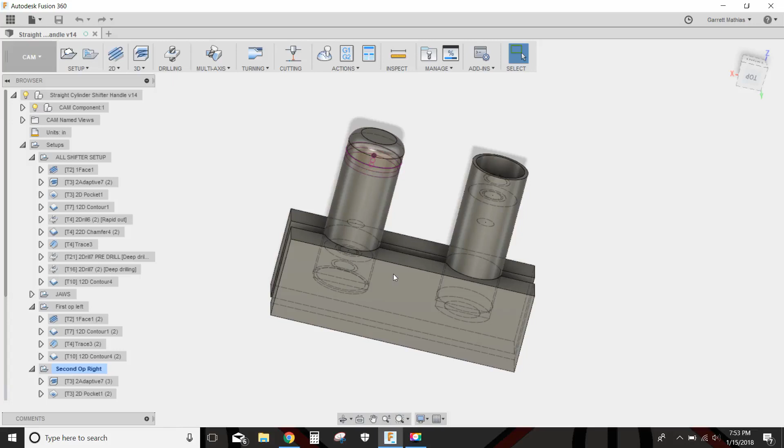Today we are going to program this part right here, and this is a shifter knob for a Ford Fiesta ST or Focus ST or Focus RS, and this is one of the simplest ones that I have ever made.

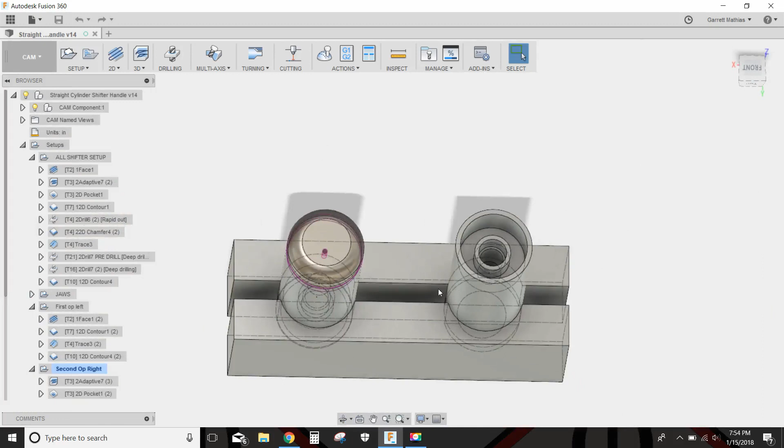Basically the stock outside here, or the stock piece I'm using, is a regular stock size piece. It's 1 3/8 inch in diameter, so I didn't have to cut anything to size, which worked out really well. So this one right here is the top side and this is the bottom side. We'll have to pocket this out and end up threading this deeper hole right here by hand with an M12 by 1.25 tap.

Now this is one of those things from when I first started, so please forgive me if anything looks kind of weird. Starting with this facing operation, for some reason I'm doing a lot of step overs here and using the shear hog, but I have no idea why I decided to step over so many times. I have a 0.06 step over with a 3/4 inch end mill. Anyway, we'll roll with it.

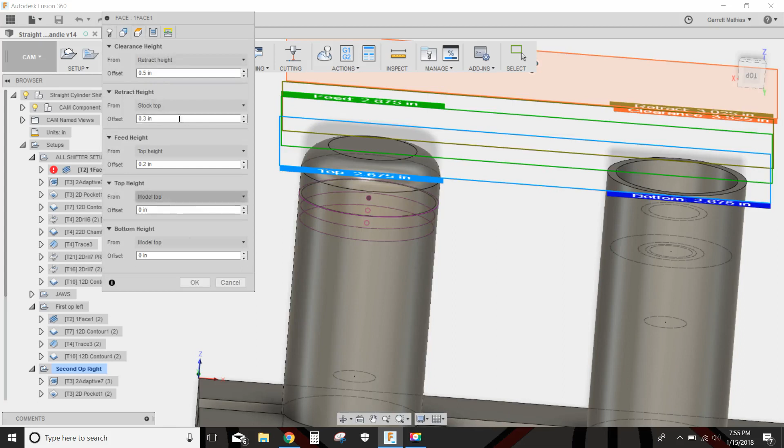4,000 RPM at 35 inches a minute, and I selected this chain right here. It doesn't really matter what you select in a facing operation because it'll just bring it down to the model top. So it always uses this model top as your bottom height by default with a facing operation, as far as I know. All the heights here are pretty default, and I used a 0.06 inch step over. I really didn't need to do that, but that's okay. I could probably go somewhere more like 0.1, and even then it probably wouldn't be enough, but that's okay.

And everything here is left alone. I almost forgot the setup here. One second while we go back to the setup.

So this stock is looking at both of these bodies here, so that's why it's 4 3/8 wide. It is 1 3/8 in depth in the Y direction, and that's just the diameter of the part, and it is 3.85 inches tall, so that's how tall each stock piece of these parts are.

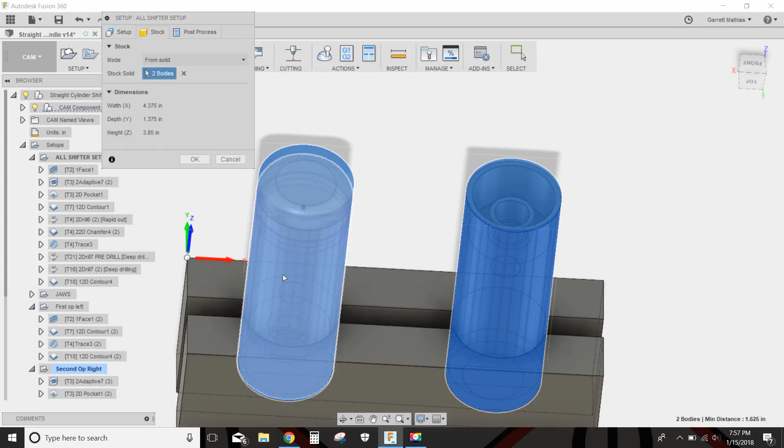In this setup I'm using these soft jaws here, and this is my point. There's no two work coordinate systems. This is my point right there on the side of the soft jaws, and that's a reoccurring theme with me. I usually use that point right there on all my soft jaws.

So after I face, I'm going to go in and adaptive everything out right here. Using a 1/4 inch flat end mill at 6,000 RPM, 30 inches a minute, I'm going to select this boundary chain, which is that green chain right there, and I have rest machining selected for no reason because it's always from the stock setup, so that doesn't really need to be selected there.

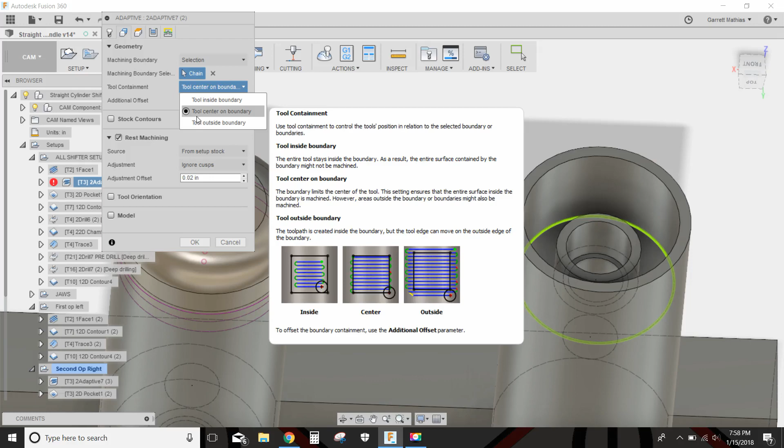From this boundary chain, I have tool center on boundary, so you can see in the dialog box here what that really does, and those dialog boxes help a ton when you're trying to figure out what the toolpath does. In the heights tab, it's pretty generic here, nothing too big going on because this is a regular 3D adaptive toolpath, so it just knows what's going on wherever. It's kind of cool how it works out, so you don't really have to do too much with those, is what I found out.

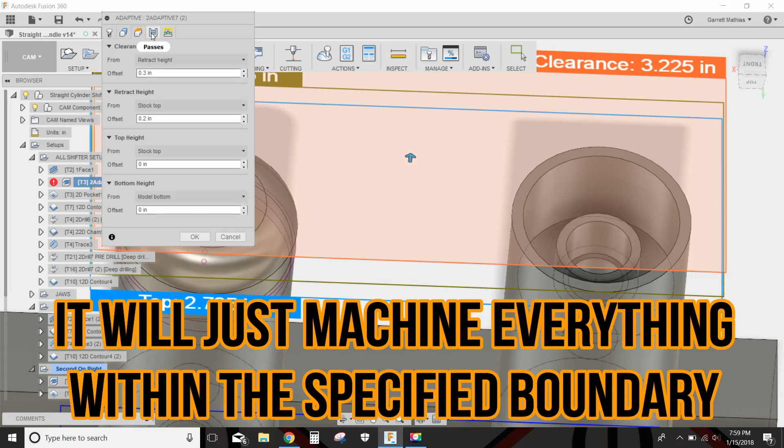Our width of cut or optimal load will be 50 thousandths of an inch. That stays the same. My roughing step down will be 0.13 inches, and my fine step down will be 0.1 inches. I'm leaving 10 thousandths of an inch radial stock to leave, so that's on the sides, and I'll come back and clean that up later. Everything on this tab should remain the same, except this right here.

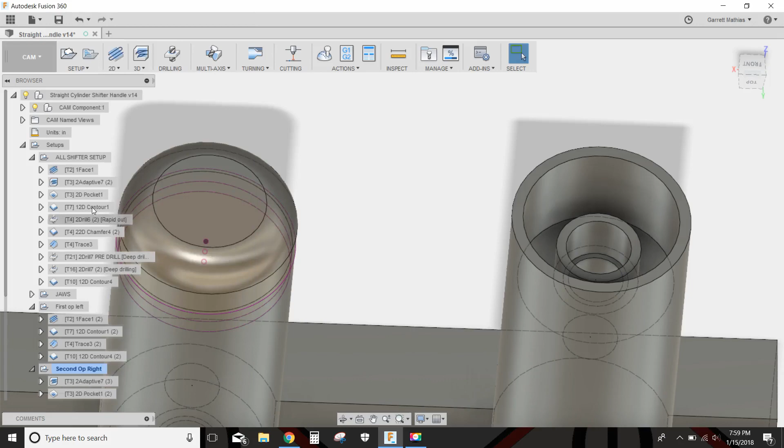0.1475 helical ramp diameter. So after I click out of here and click it, the red mark right here, that's the helical ramp diameter, and that needs to be a lot smaller so it can get down into this pocket right here, because if it was any bigger, then the tool would be hitting the side. It would actually give you an empty toolpath, so that's always annoying.

So watch out for that on your 2D adaptives and regular adaptives. Always remember that your helical ramp diameter needs to be small when you're doing those smaller pockets like that.

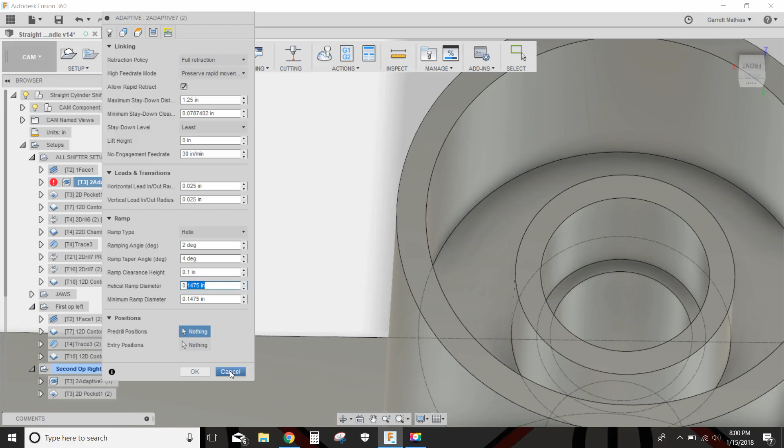Next up, to clean out that pocket there, is a pocket toolpath. Using the 1/4 inch end mill again, 5500 RPM at 25 inches a minute, I am going to select this whole area right here, this big pocket.

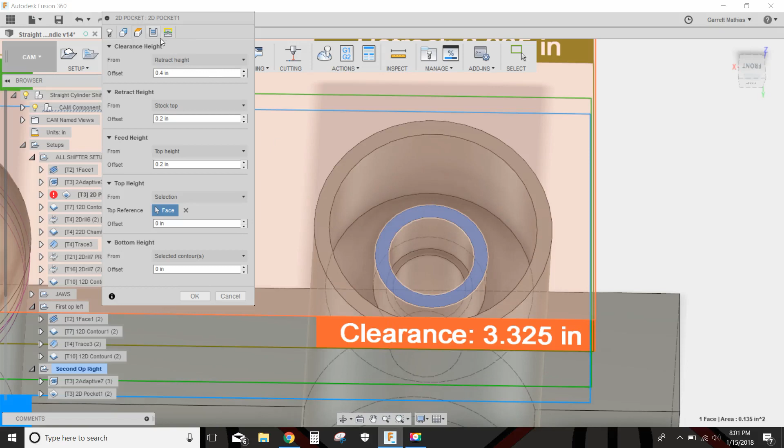In the heights tab, the top height is this right here. I changed this top height to this face because everything else has now been machined out to that point, so I don't want to waste time coming up here and trying to ramp down to where there's material to cut. So everything is left alone.

In this area right here, I'm going 0.08 inches deep, and that doesn't sound like a lot, but I'm cutting on all sides here, all the way around, so it's a little bit rough for this one. Multiple depths, 80 thousandths of an inch each depth.

I'm leaving no stock to leave, but it's check marked for some reason, and it doesn't need to be check marked because it already says 0.

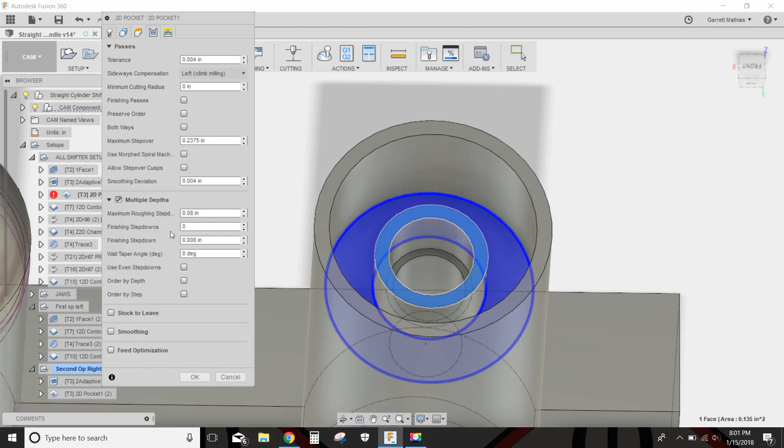Everything is pretty much left the same up here, except in this area I'm using a 0.5 degree ramping angle. This is very shallow, so I can get a nice gradual cut into the material rather than hardcore, because that'll slow everything down. Since I'm cutting on all sides, that makes everything a lot harder to do, so that's why I'm going so shallow on the ramping angle. That's the only thing that really changed right here.

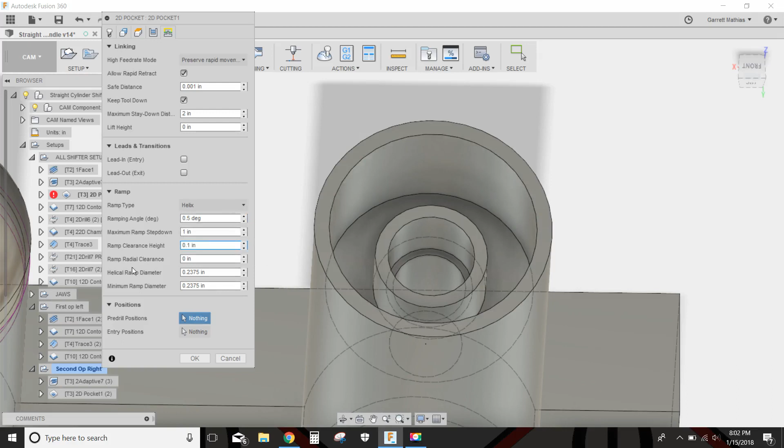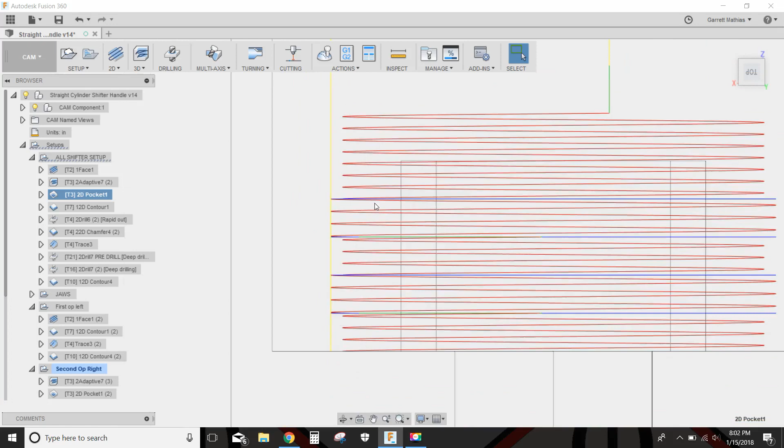You'll see what kind of toolpath this gives us. Let me turn on wireframe. You see we're barely ramping down until we get to that 80 thousandths of an inch deep from this point. You can sort of see it from the top of that face. 80 thousandths deep is that blue line, then it'll clear everything out for a second and start ramping down again and again. That's how we get that toolpath.

Next up is a pretty cool toolpath. You can see the tool I'm using here. It's a radius tool. Not a whole lot of people use those. It's kind of cool how they work.

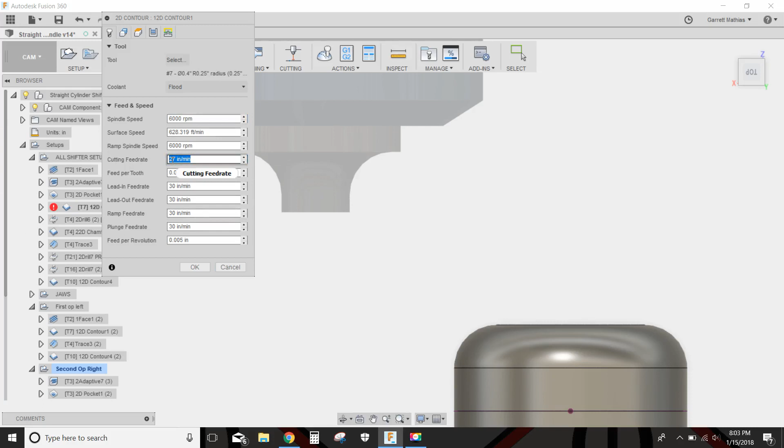This took some trial and error to get the right depth, so you're not cutting up here on the tool. But we have this 1/4 inch radius tool, so this radius right here is a 1/4 of an inch. We're running this thing at 6,000 RPM at 27 inches a minute. This was always frightening to use for some reason, just because it was so big and bulky.

So I selected this chain right here, and that's to bring basically the nose of the tool to this point and machine around it. We'll go back to the toolpath so you can see what I'm talking about, right here where the middle of the tool goes.

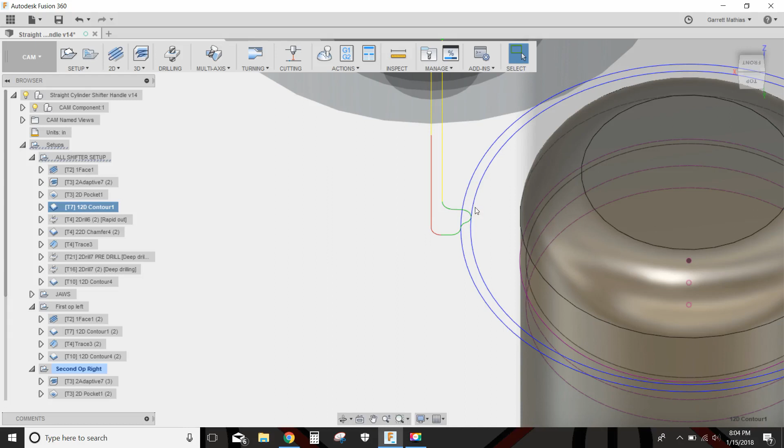So I'm going to do one pass around and then the final pass. That's just to prevent a whole loading up of the tool and all that kind of stuff. So that's why I'm doing 2 passes here.

This is what took some trial and error. After doing this a few times, I found that if I select this edge, so my bottom height right here, I selected this edge, and I'm going negative 65 thousandths below that edge. That's what I found is the best way to go for this tool, and that gives me the best radius here on the actual part itself. So that's ultimately what I went with.

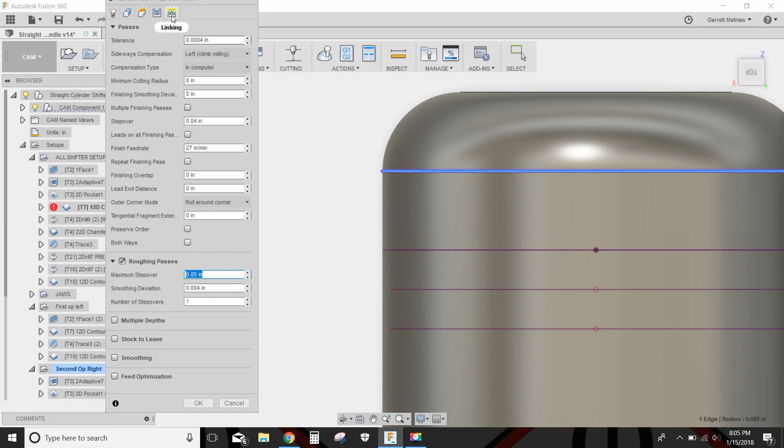Everything up here is left alone, and I've selected roughing passes, and each step over is 50 thousandths of an inch, and I'm just doing 1 step over. So that gave me those 2 toolpaths there that you already saw. And then everything on the linking tab is the same.

So next up, I'm going to use my 90 degree spot drill, 1/4 inch spot drill, 7,000 RPM at, well, that should have been like 35 inches a minute, but no big deal there.

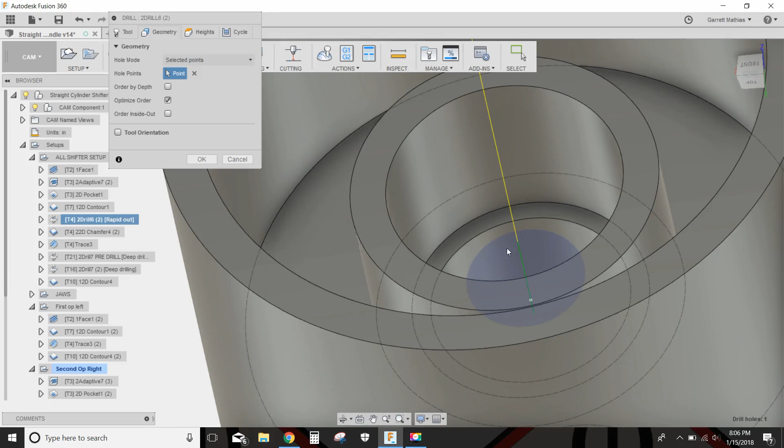I'm going to select this point right here. There's no stock left there yet because the adaptive only got down to this point. So we're going to cut out some material to make room for our drill, to drill out this hole to size to be tapped.

Using this tool, 7,000 RPM at 35 inches a minute, I selected this point right here, that center point. To select that point, I select this circle right here, and that gives me that point. Make sure you have points selected.

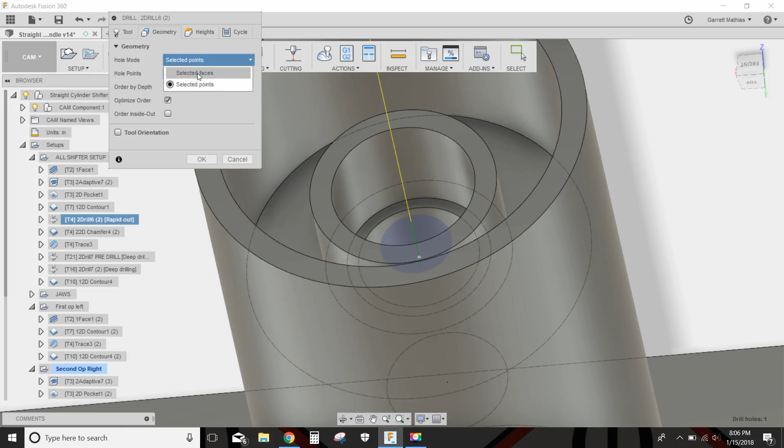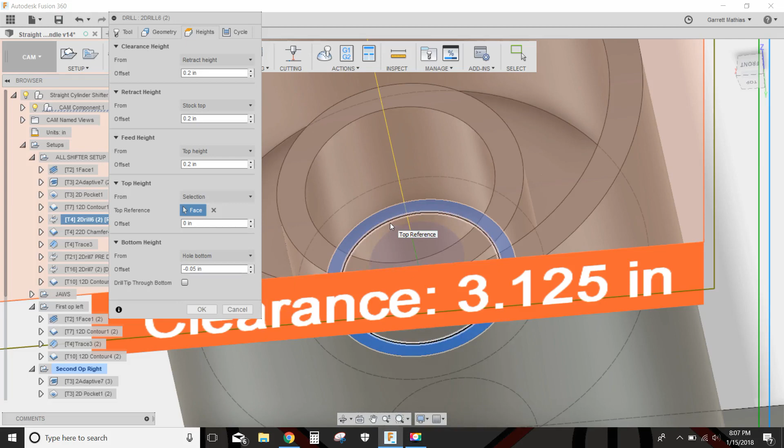For the top height, I have this face selected, just a little shelf looking thing there, and the hole bottom is after I selected this, that thing sets the hole bottom, so I'm going 50 thousandths of an inch below the hole bottom.

And then just really, real quick, drilling rapid out. No need to peck or anything like that.

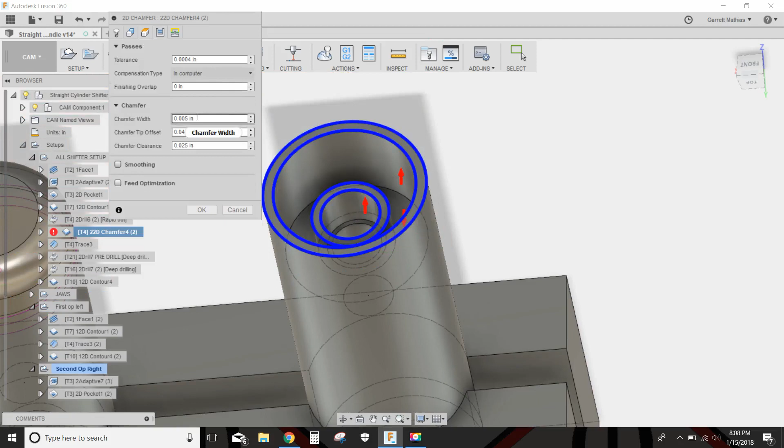Next up is the chamfer. We're going to use the 90 degree spot drill again, 7,000 RPM at 20 inches a minute. Again, that could have been a lot faster, but this is in my early days. I selected all of these points right here and left everything here on the heights tab. The chamfer width is 5 thousandths of an inch, and everything else is left the same.

Next up, I use the spot drill again to trace my logo in the top of this shift knob. We'll turn on wireframe so you can see what that looks like. So that's what it looks like there.

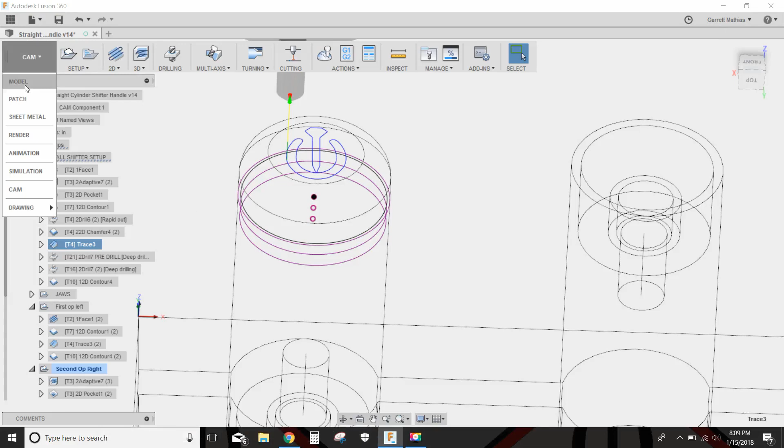From the dog bone video, I used this DXF image vectorization tool online to get my logo. In the model tab, you can see here I have my logo right here. It doesn't matter that it's kind of upside down, but this is the only thing that really matters. I just imported it and put it on this face here.

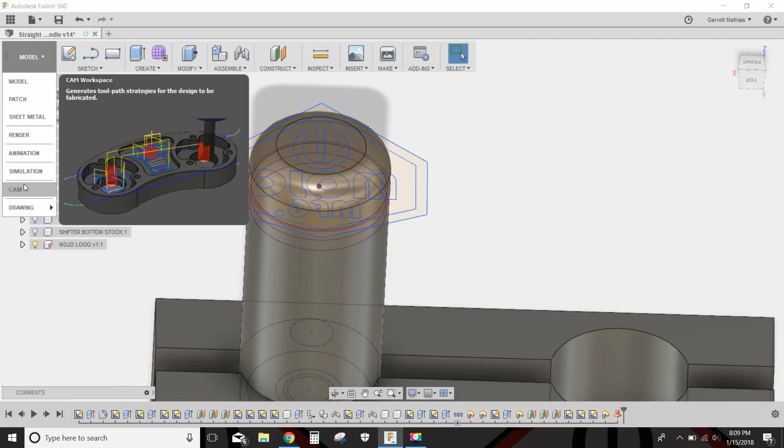John Saunders has a bunch of videos from a while back where he did this actually, and it's pretty cool how it works. So I ended up doing that, and I selected this part of my logo here, and that gave me this tracing operation.

So go here, I'm using the 90-degree spot drill at 8,000 RPM, 20 inches a minute, and I selected that part of my logo here. That'll just trace out everything that it sees, and it looked pretty good after I did it the first time.

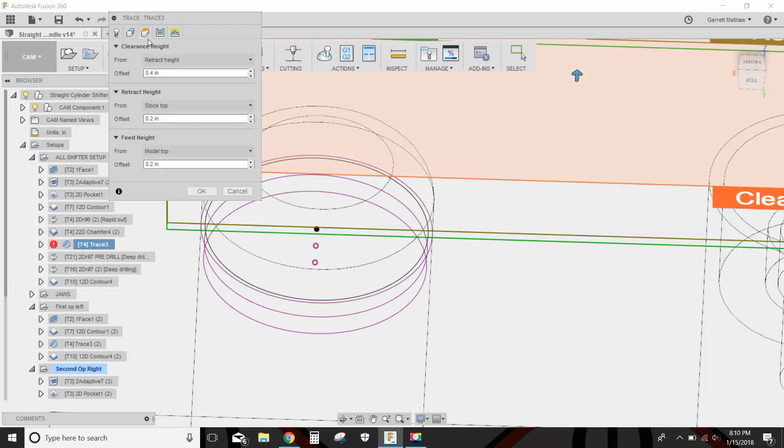Everything on this tab is left the same, and on this tab, chamfer doesn't need to be checked, but the axial offset does. This axial offset is how deep the tool is going to go in the material. So I'm going 10 thousandths of an inch deep.

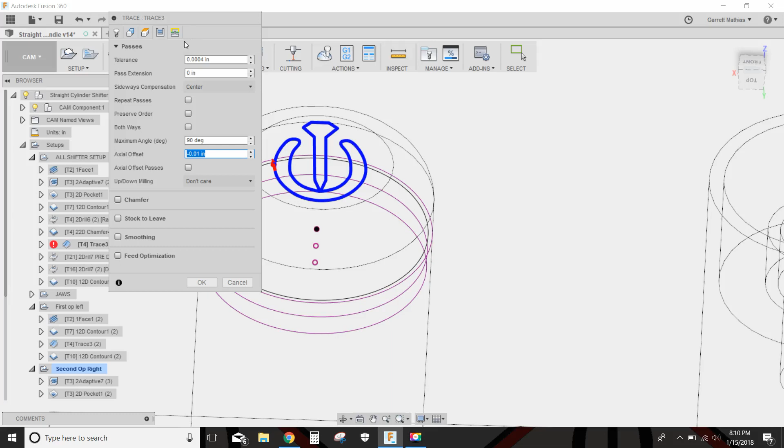That is pretty deep for this type of thing, but it ended up looking fairly well, and I always kept it, so I never messed with it again after that. Maybe a little bit of light sanding after it was machined is what made it look the best. And then everything on the linking tab is left the same.

Now I'm going to come in with a 17/64 drill and basically pre-drill out this big hole here. You can see it, how deep it goes. It goes 70 thousandths of an inch below the hole bottom.

So I selected drill tip through bottom, and then I went an additional 70 thousandths. Everything else was left the same on this. This tool, like I said, is a 17/64 drill, running at 3,000 RPM and 10 inches a minute.

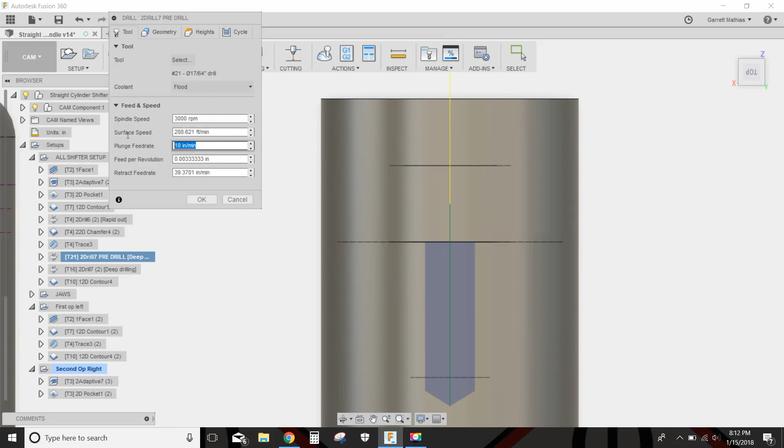And I selected this point, I selected this face actually on this one. That's different, I'm not sure why I did that. Anyway, I selected this face, and then it'll give you the same thing. It knows where the hole bottom is after you select the face.

No big deal there, and I'm using a full retract cycle on this. So at 80 thousandths of an inch is what I'm pecking, and it will retract the full length of the hole each time. So it takes a little bit longer, but it gets the chips out of there real nice.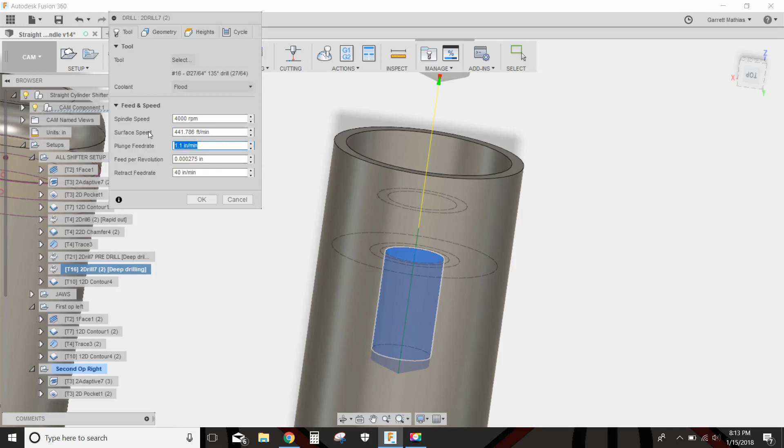And then that'll make room for the big drill. This is a 27/64 drill running at 4,000 RPM, 1.1 inches a minute, and this is back when I really had trouble drilling. So it's been a while since I've made these. 1.1 inches a minute is what I went with, and this was probably with a hardware store drill.

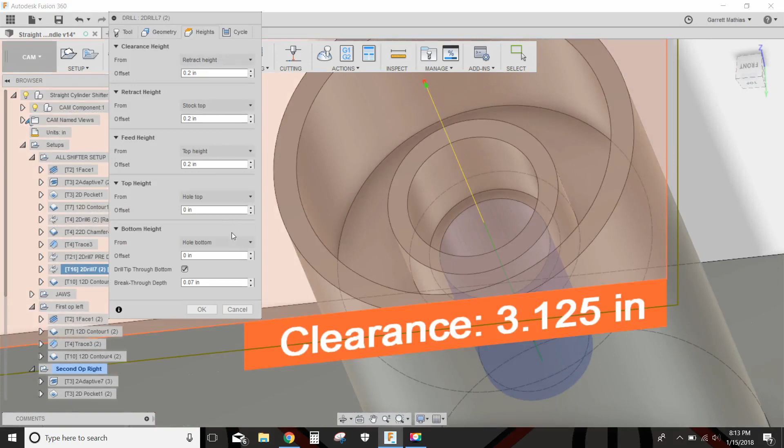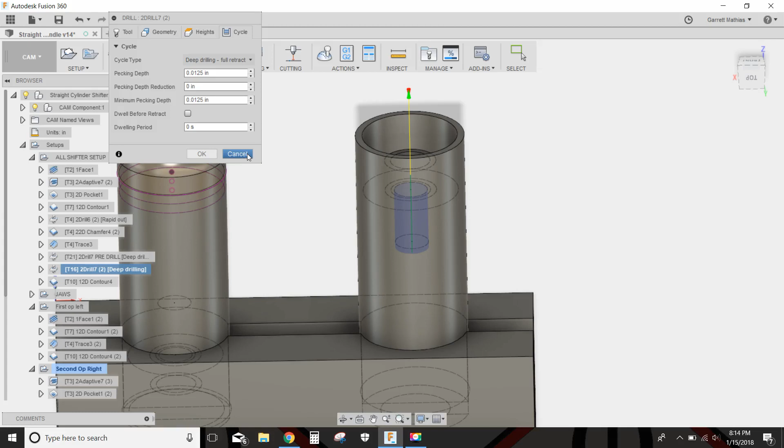So I selected that face again, basically this whole cylindrical face here. Select it again right there like that. And the heights, I did the same thing here. Put the drill tip through the bottom and added another 70 thousandths of an inch. And I'm using another full retract deep drilling cycle here at 0.0125 inches. This was, like I said, back when it was a rough time drilling. But now at this point I have much better tools, so I've always bumped this up. I just haven't made these in a while.

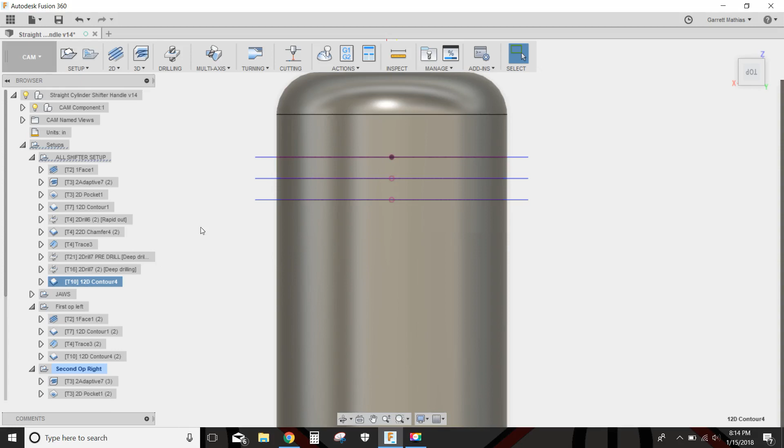And lastly, I made some, I like to call these piston shifters, and in pistons they have the ring lands where the rings are set in the piston. So I wanted to make some cool contours here and make all three of them, resembling each of the three ring lands that a piston would have. So I basically faked out Fusion 360 and told it that this was a slot.

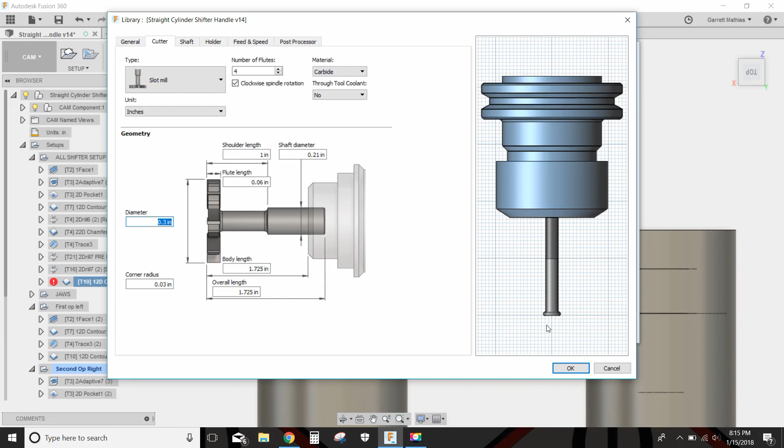This is not a slotting mill. This is what I told it it is, but it's actually a thread mill. I gave it all the dimensions of my thread mill, 0.3 inches in cutting diameter, and gave it the rest of my specifications for that thread mill. Except now in Fusion 360 it looks round and looks like a slotting drill, or slotting mill. But what we actually used was a thread mill, and that cut those sharp corners in there.

So at 7,000 RPM, 30 inches a minute, we selected these points here, and those are sketched in circles. As you can see, these maroonish looking marks, I basically sketched those in and brought those circles in as far as I could so I could select a contour to make this tool go to that point. And that's pretty much how it worked.

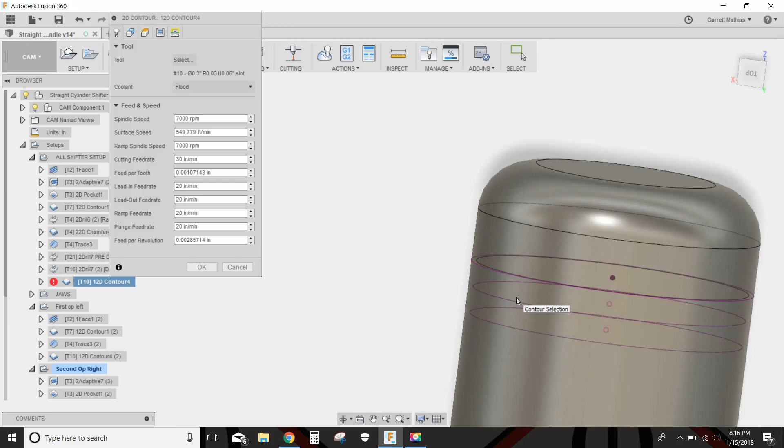So once I selected those points there, you can see all three of them. Let me just show you the tool path really quick, because that's the center of the cutting tool there. It'll barely just touch around the circumference of this shifter handle here, and that'll make a cool little tool path. I'll show it in the simulation here in a second.

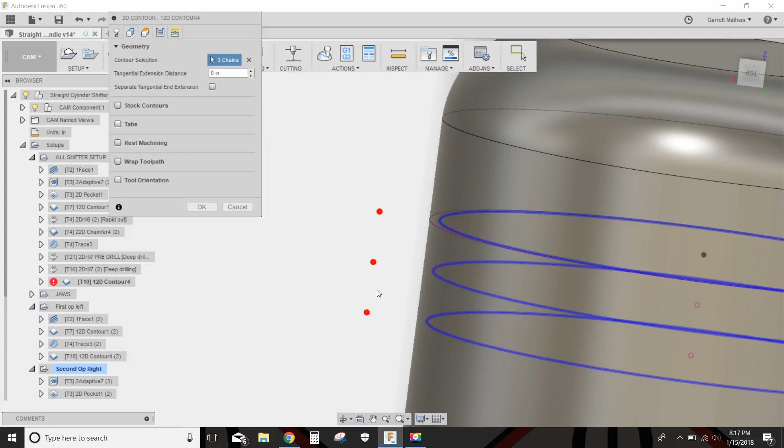So I didn't touch anything on the heights tab, didn't touch anything here on the passes tab, and everything on the linking tab is the same as well. So basically I just selected those and selected my tool and let it rip.

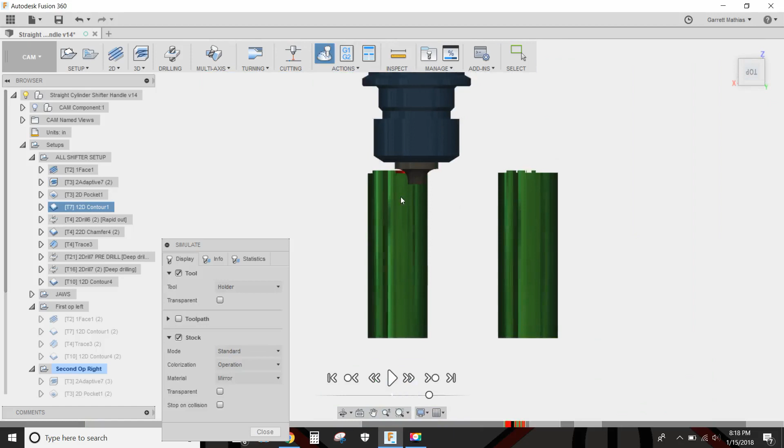Fixing that up. So on this, it thinks the top of the radius tool is lower than it actually is. I'm confused on why Fusion thought that. It's not a big deal because I can clearly see that the top of that radius tool is not hitting the top of the stock, but it thinks it is, and it's giving an interrupted piece here, and it's just kind of crazy. But that's no matter, it didn't do it in real life, so it doesn't matter.

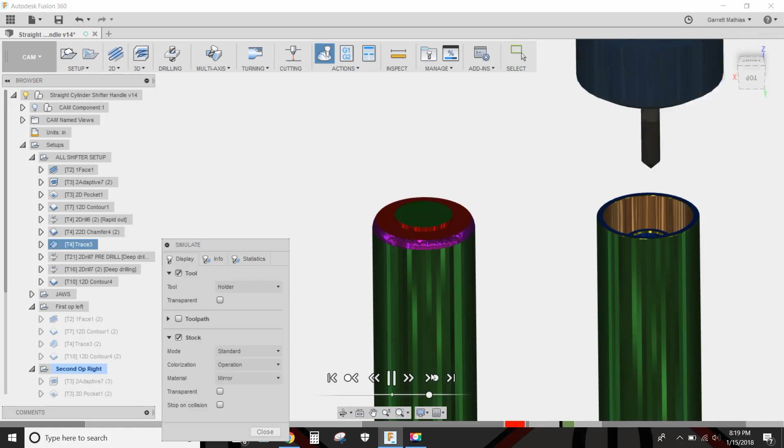So now it'll come in and do the engraving here, and the drilling. And next up is this contour.

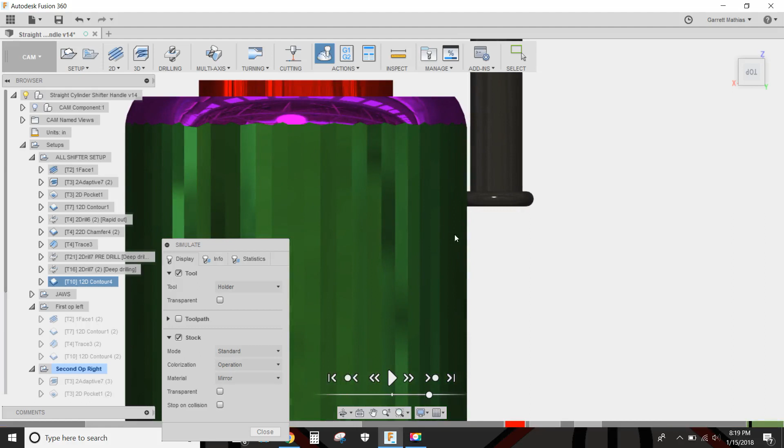So there you go, right there. It'll just barely touch around there. And these aren't rounded like you see here, they'll be sharp because it's a thread mill that's actually cutting this. So it'll go around, and that's what it'll look like after it's finished, except actually kind of sharp. And these will be a little bit skinnier than you see here. So that is it, pretty cool on this one.

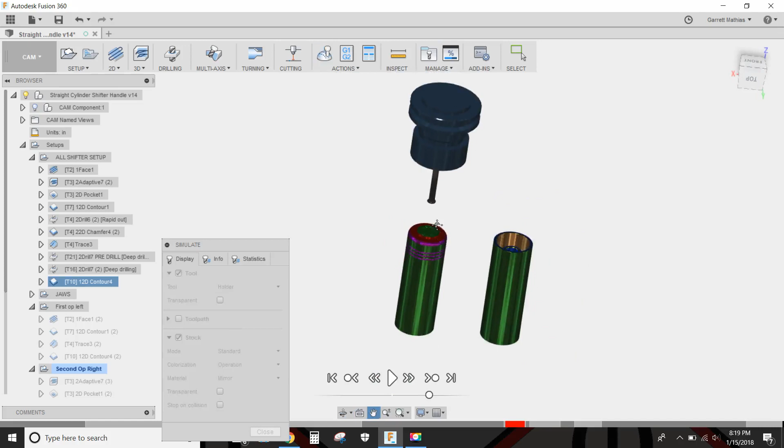This was one of the first shift knobs I ever made, besides the pistol grip shift knob, and I really enjoyed making it. It's one of the first things I ever made.